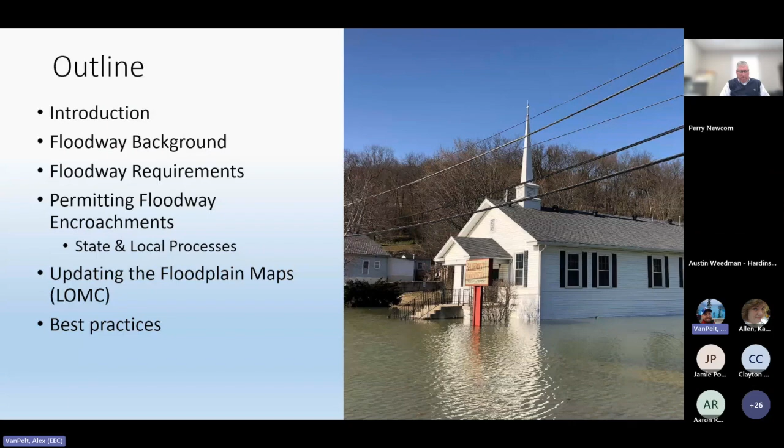So again, if you have questions as we go through any of this, guys, please ask them in the chat. All right, so diving right in, let's talk through the introduction.

If any of you have ever seen a presentation from me, I always start with these slides because they're important. So why do we care about floodplains? Floodplains are just inherently dangerous areas. The maps that we look at are actually a probability map. It's showing us where a flood is most likely to occur, right? So anything in the floodplain is considered to have high flood risk.

From 1996 through 2020, that's about a 25-year period, Kentucky had 100 flood deaths, which is significant when you look at that same period because we had about 1% of the U.S. population, but we accounted for about 4.5% of all the flood deaths in that 25-year period. If you bring that period all the way up until the end of 2024, essentially today, that number would be well over 150, just because during the Eastern Kentucky floods in 2022, we lost more than 40 people due to flood-related deaths.

So a little background on the NFIP, because that's the program we're working under. The National Flood Insurance Program is a voluntary program that no community has to join. A little over 90% of Kentucky communities are in the National Flood Insurance Program, but it is voluntary, right? So not all communities are within.

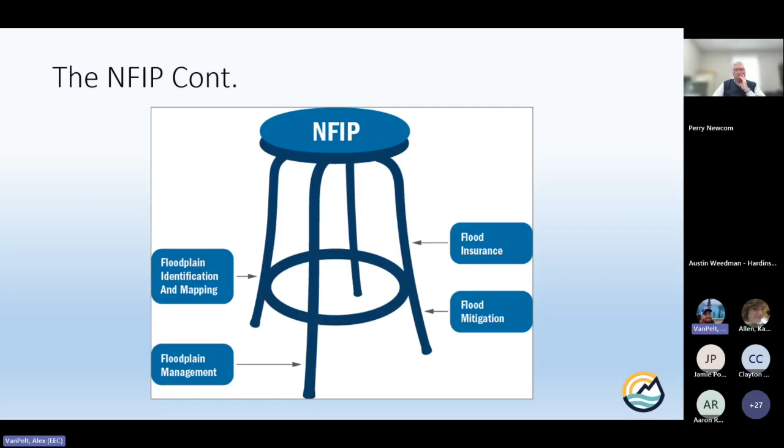All right, so that's our introduction. Let's start talking about floodway specifics.

So what are we talking about when we say floodplain or floodway specifically? The floodplain is pretty simple and intuitive - it's the low-lying area adjacent to a river or stream that is subject to periodic flooding. It's kind of the overflow valve for water flowing during a high flow event. A typical stream, within its banks, can usually contain anywhere from a 1.5 to a 2 year storm event - a storm as big as you'd expect to get only about every other year. We regulate under the National Flood Insurance Program up to the 100-year event, so significantly more water, and that water has to go somewhere - it overtops the banks and spreads out across the plain. That's our floodplain.

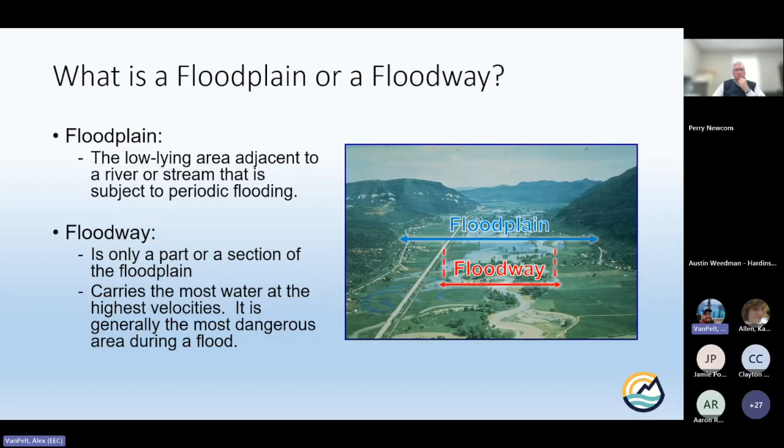When we're talking about the floodway, it's still a portion of the floodplain, but a very specific section. The floodway is typically the area closest to the stream, and it carries the most water during flood events. Those waters typically flow at higher velocities because the water is deeper and experiences less friction across the bottom or banks of the stream. The deeper the water gets, the less friction it experiences, and typically the faster it can flow. So the floodway really is the most dangerous portion of the floodplain during high flow events.

When it comes to mapping that risk or identifying our flood risk, FEMA is ultimately responsible for producing, updating, and maintaining all the flood insurance rate maps - what we commonly call floodplain maps - for everything in Kentucky. The Division of Water is a longtime cooperating technical partner with FEMA, which essentially means we subcontract that work from FEMA. We still create the maps to FEMA specs, and FEMA still funds those updates and reviews.

But the Division of Water, we're the ones doing a lot of the legwork - the communication, the public meetings, and things like that. So we're essentially a subcontractor for FEMA for the map updates.

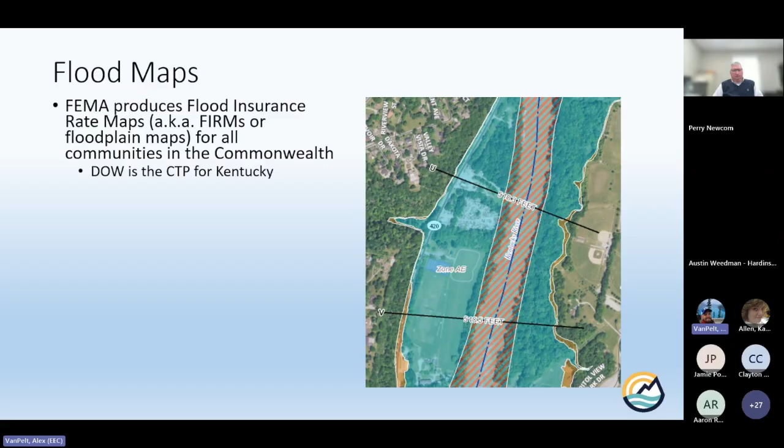On the flood insurance rate maps, they're going to show you the area of 1% chance or greater of flood - that's our 100-year floodplain, shown in blue on the map to the right. Other common things on these flood maps are your regulatory floodways, typically only found in Zone AE, shown here in the center of the map with the blue and red colored hash mark. That's the floodway for that portion of the Kentucky River.

In AE zones, you'll typically also find base flood elevations, and the 0.2% chance floodplain - what they used to call the 500-year floodplain - shown in that beige gold color on the edge of the 100-year floodplain. You'll also find community landmarks like corporate boundaries, county boundaries, streets, highways, and interstates - things that help you reference where you're at in your community.

Once these floodplains are identified on the flood insurance rate maps, those are the areas where we start regulating development. Once you move into that second leg of the NFIP stool, everything shaded in blue or blue-red is the area where permits are required and where flood insurance is mandatory if you have a federally backed loan.

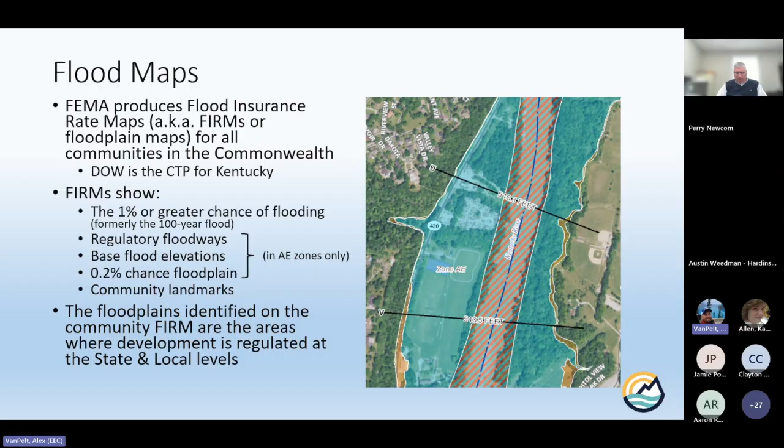So specifically when we're getting into the floodway, before I show you how they create it, I want to give some background. Within the floodway, that's a very specific portion of the floodplain. Nothing can be put there that would cause any rise in base flood elevation. The easiest way to think about it is you can do whatever you want in that area, you just have to show that what you're doing isn't going to cause a rise.

Remember, the floodway is the area that floods first, with the fastest velocities and deepest water. It's generally the most dangerous area of the floodplain during a flood event. So floodways are more restrictive than the rest of the floodplain, simply because they're typically more dangerous.

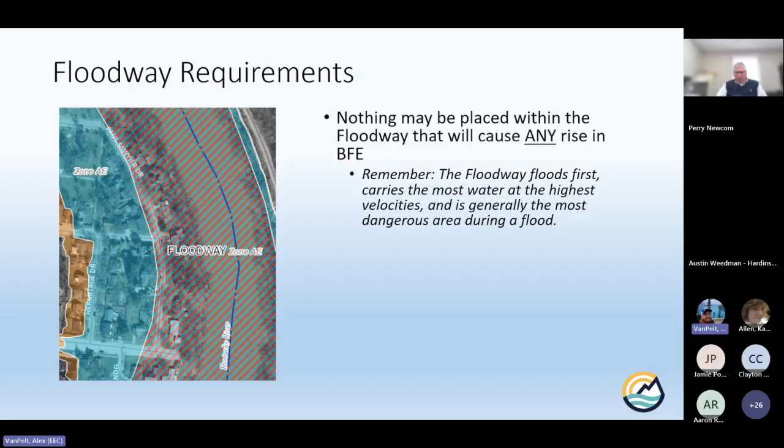Anybody wanting to do work within the floodway has to hire a professional engineer, or PE, who has to do an engineering analysis, basically showing their work. It's not enough to say this is such a little project and the river's so big. You have to show your work to prove that what you're doing isn't going to cause a rise. So the professional engineer the property owner hires has to submit data to the Division of Water.

That data includes hydraulic models showing the proposed conditions, what they want to do on that piece of property in the floodway. They have to show those models to us as part of their permit application process, and they also have to complete a no-rise certificate form, which we'll talk about more when we get into permitting the encroachment later on.

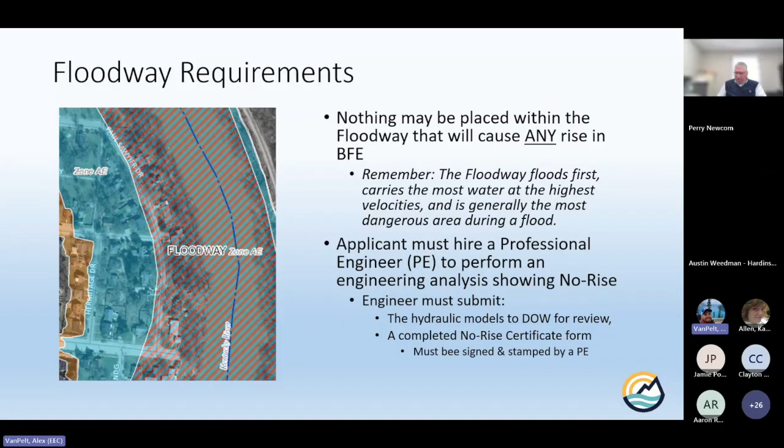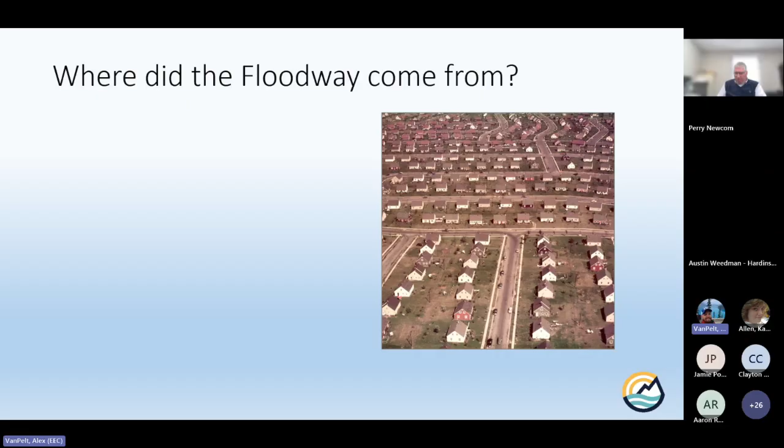So where did these floodways come from? Well, that's a long story. Floodways early on were really a simple solution to a very complex problem, and I'm going to show you that by going through a little timeline here.

In 1968, the National Flood Insurance Act was passed by Congress, actually as part of the Housing and Urban Development Act. This act stood up the National Flood Insurance Program, established what the program was about, and set up the carrot and stick parts of the program, such as communities managing their local flood risk while the federal government makes insurance available and ties grant dollars to it.

It also established some basic floodplain and floodway regulations in that original 1968 Act. About 10 years later, in 1977, President Carter signed Executive Order 11988, one of the primary guiding documents that has shaped everything we do in floodplain management since. In it, Carter said to provide for the discharge of the base flood, or what we now call the 100-year flood, so that a cumulative increase in water surface elevation is no more than a designated amount.

This was basically the first recognition that if you have very strict floodplain requirements, you're essentially making those parts of your communities unbuildable. So we don't want to do that. We want to allow for some level of development in these areas because they are beautiful areas and people want to typically live or work near water.

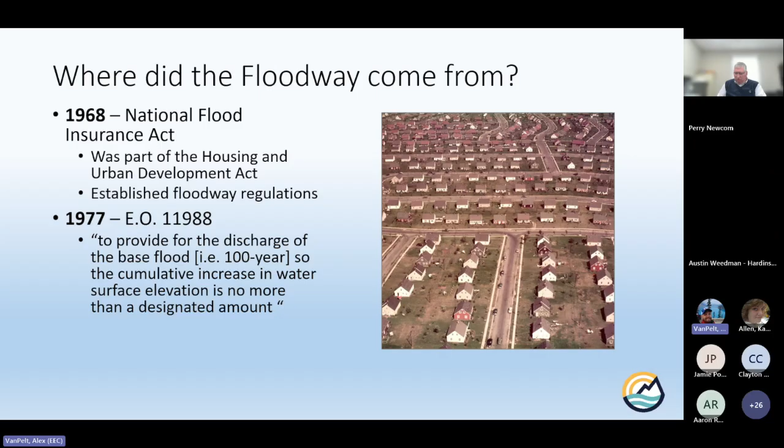President Carter, when he signed this, ordered the Army Corps of Engineers to do a study to settle on what that designated amount was. In 1978, the following year, they released that study that basically set the floodway target at the 1 foot allowable rise that we have today. So you can develop in the floodplain and cause up to 1 foot of rise without running afoul of the floodplain regulations.

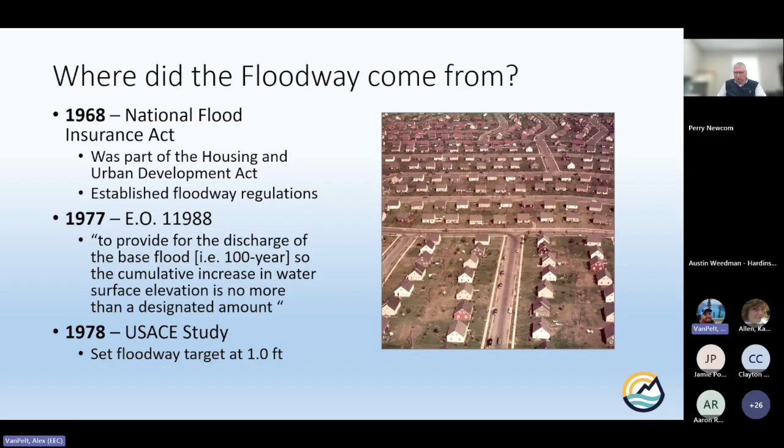A couple years later, in 1984, this is after FEMA was created, so they were the ones managing the National Flood Insurance Program at this point instead of HUD. This is also where we started to get to the point where we had good enough data that instead of just creating boundary maps, they started creating the first actual flood insurance rate maps. Those are the first step in the maps we're still using today.

So in the mid 80s is kind of where you started hitting the point where there was enough data and confidence in the data and the engineering that they started putting the floodway boundaries on the flood insurance rate maps. Once that happened, once it's on the floodplain map, the only way it can be removed is by either a letter of map change or a floodplain map update. So once the floodway is on the map, we're going to be using it probably in perpetuity unless there's some major change to the National Flood Insurance Program.

So once a floodway is on the map, it's pretty much there. Over time, though, floodplain managers started realizing some of the issues and limitations with using floodways as they were originally designed. Once you start hitting the 2000s and 2010s, the data has caught up, so some of those initial engineering challenges when they were first setting these floodway targets no longer really existed.

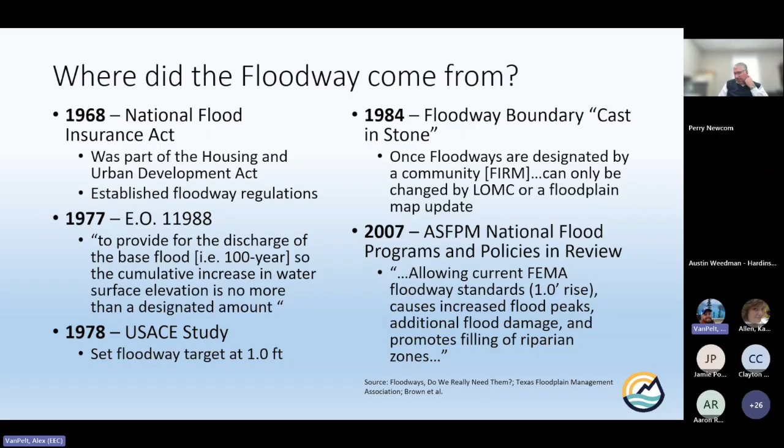You see additional flood damages because you're allowing folks to develop in these high risk zones, and you're promoting essentially the filling of some of these riparian areas—riparian meaning the green space areas along streams or rivers. People want to live close to water, and when you lose those riparian areas, you're also damaging your floodplain, meaning it may not store as much water as it did before, but you're also losing other ecological benefits. You're dealing with water quality issues at that point, things of that nature.

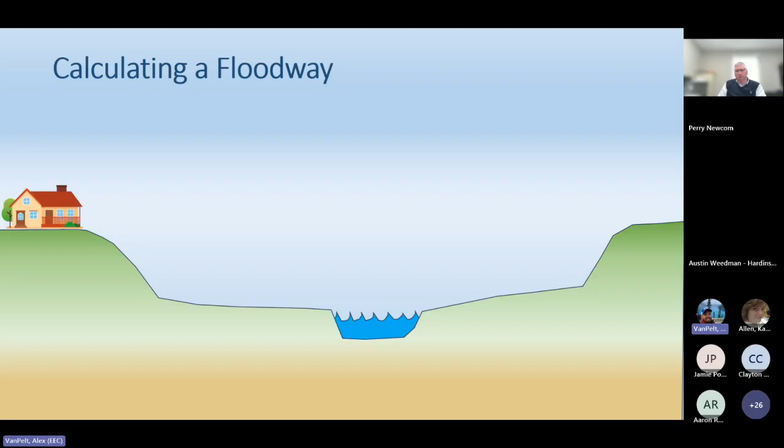So how do we actually calculate a floodway? Now that we know where they came from, let's talk about how our risk map team actually goes through and updates the floodplain maps—how do they actually get to a floodway on the map? Before we can calculate a floodway, the first thing we have to figure out is our base flood elevations.

So when we're looking at that, there's two primary factors that can influence your community's base flood elevations. The first one is essentially our stream flow amounts or our rainfall—basically how much water and how it falls across the watershed. That's our hydrology, the study of how water falls across the landscape.

Once it's on the ground, where does it go? That's primarily dictated by our topography or our ground elevations. So how water flows across the ground is the study of hydraulics. So when you hear us say you have to hire an engineer to do an H&H study, or we need the hydrology report or the hydraulics report, that's essentially what we're talking about: the study of how much water is falling on an area and how it flows once it reaches the ground. Those are the two primary factors we're looking at.

All of that leads us to our stream channel. As I mentioned before, a typical stream within the banks of a channel can hold anywhere from a 1.5 to a 2-year storm event. But the National Flood Insurance Program regulates up to the 100-year event. So where does that water go if it can't stay within the banks of the stream? It's going to spread and go up and out.

Once we know approximately how much water is flowing through an area at a certain point, we can do a probability analysis—I think it's actually called a regression analysis. They also do a gauge analysis. There are a lot of different ways, but they've essentially figured out, during that 1 in 100 chance flood, how much water is going to be flowing past a given point.

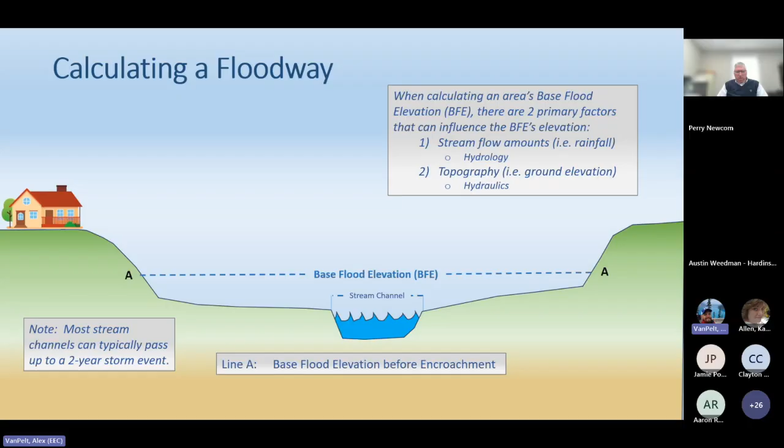And then where does that water spread out? That's our topography. Once you have those two things, you essentially have your base flood elevation—how high we expect the water to get during that 100-year flood. The extent of that base flood elevation as it spreads out across the landscape is our 1% chance floodplain, the floodplain we regulate. Basically, everything shaded in blue is areas of the community we expect to be covered, either partially or fully, during that 100-year flood.

So you might have a tenth of an inch, or you might have 10 feet of water, but it doesn't matter. If you're in an area shaded blue on the floodplain maps, that's an area we expect to see some level of water during that 1 in 100 chance flood.

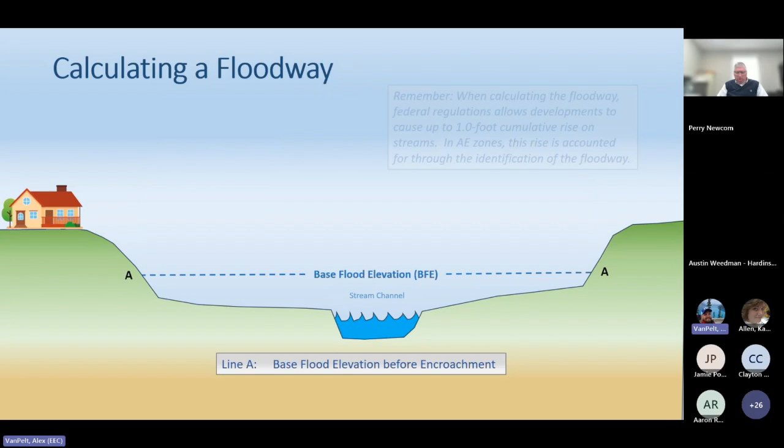Once you have your base flood elevation, the next thing we have to do is remember our floodway requirements. The floodway is basically set up so you can cause up to a 1 foot cumulative rise on a stream without running afoul of federal regulations. So when calculating a floodway, we're essentially going to squeeze the landscape until we cause a 1 foot rise in the base flood elevation.

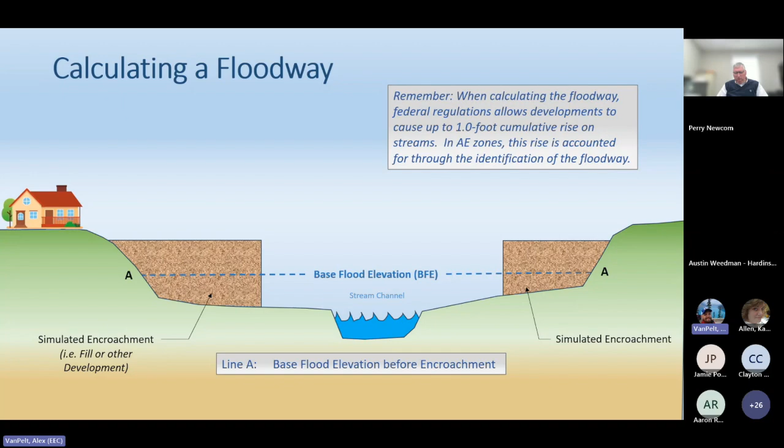Nowadays it's all done in a computer, but we basically simulate some level of encroachment—either we raise the ground elevations up above the BFE, or we put fill in, or they create a flood wall or some other type of impermeable barrier—where essentially we're squeezing and squeezing on our floodplain. When that happens, you're losing a lot of the storage you previously had, as those simulated encroachments are on the left and right side of the floodplain.

When the water can't spread out, there's only one way for it to go, and so it goes up. They keep squeezing that floodplain until they hit that 1 foot allowable rise, which is also commonly called a surcharge—basically the upper limit of what you can do under the regulations without running afoul of them. Once you have that 1 foot allowable rise, everything between those two points where that simulated encroachment was occurring becomes our regulatory floodway.

So that 1 foot allowable rise that the NFIP allows is already calculated when you're looking at the floodplain maps in the floodway. That floodway is the area that has to be reserved to allow the 1% chance flood to flow past without causing more than that 1 foot allowable rise. You can see as you squeeze that floodplain, you get that 1 foot rise, and everything in between is our floodway—so really, we're already calculating that in. You don't have to worry about that.

Now, this is just a simulated encroachment—we're not actually squeezing the floodplain. This is all done in a computer model. So our line AA, that blue line where our base flood elevation is, when you're looking at it on the map, that is still going to be the regulated floodplain. Everything we expect to get wet during that 100-year flood still requires permits, still requires insurance if you have a federally backed mortgage, and things like that.

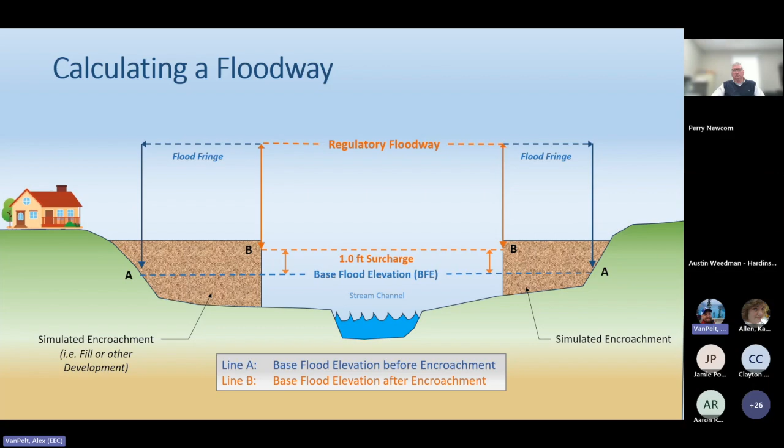All right, so let's dive into, now that we know the history of the floodway and what some of the requirements are, or how they get to what it looks like on the map, let's start talking about some of the floodway requirements. So there's three levels of regulation that all feed together in the National Flood Insurance Program: federal, state, and local. We're going to start with federal, and then move our way over to local as we go through this.

Hopefully, what you're going to see with this is a lot of these regulations are identical or nearly identical across all levels. So starting out with the federal requirements, the Code of Federal Regulations, CFR, that is actually where we find our regulations.

So Part 40... Title 44 of the Code of Federal Regulations, Part 59, is the definitions for everything floodplain, floodway related.

So in the definitions, they actually define what a regulatory floodway is. It is the channel of a river or watercourse and the adjacent areas that have to be reserved to discharge the 100-year flood without cumulatively increasing the water elevations more than that 1 foot allowable height. That's what our floodway is.

Again, hopefully you saw that visually on the last couple slides as we were going through. But this is the area of the floodplain that we have to reserve to make sure that any development we do doesn't increase surface elevations more than that 1 foot allowable rise.

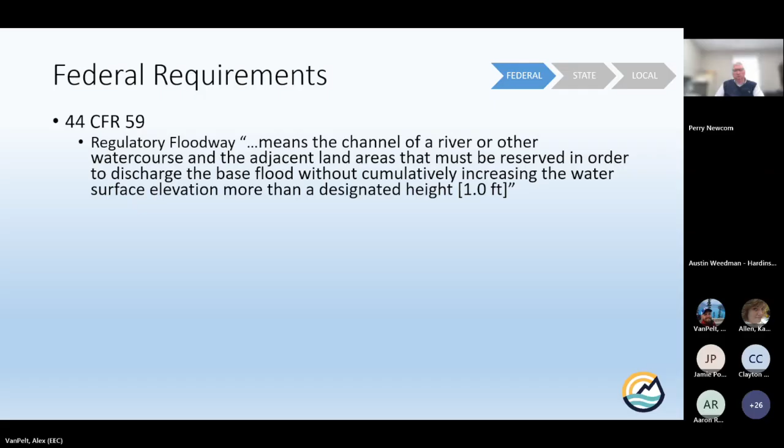The other part of the Code of Federal Regulations is Part 60. That's actually where the federal regulations live as far as what's allowable in the floodplain, depending on what level of map detail you have.

So 44 CFR Part 60.3 D3 is actually where it talks about encroaching on the floodway. It prohibits encroachments, fill, new construction, or substantial improvements and other development within the floodway unless it has been demonstrated through H&H analysis that an encroachment would not result in an increase in flood levels during the base discharge.

Again, you can do whatever you want in the floodplain, but you have to show through that hydraulic and hydrologic analysis that your engineer does that it's not going to cause that rise. If you're interested, I included the link to the CFRs there at the bottom. You're welcome to read through it.

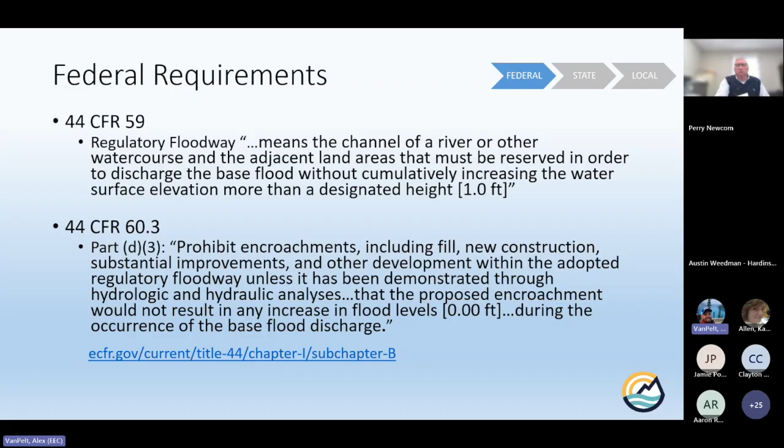All right, moving on from the federal, let's talk about some of the state requirements. So Kentucky, we actually have a state statute that gives us statewide permitting authority. Those are our Kentucky Revised Statutes.

That's what's actually passed by the legislature. So KRS 151-250 is actually our state permitting authority. It basically says no person, city, county, or other political subdivision of the state shall develop in any area adjacent to a river or stream, or in the floodway of the stream, unless plans and specifications for the work have been submitted and a permit issued.

So basically, this is where we go back to anytime people say, I don't need a permit, or I'm not in the floodplain. We have authority to make that call.

Along with that, Kentucky's unique. I talked earlier about how in the NFIP, it's a voluntary program — no community has to join. Well, because we have statewide permitting authority, we actually are able to issue floodplain permits in every community across Kentucky, whether your local community participates or not.

And part of that authority, 151-320, says that the community CEO shall enforce with the cabinet the provisions of 151-250 and any of the regulations issued along with it. So whether your community participates or not is going to dictate whether or not you have to issue any local permits. The state permit applies, though, regardless of if your local community joins or not.

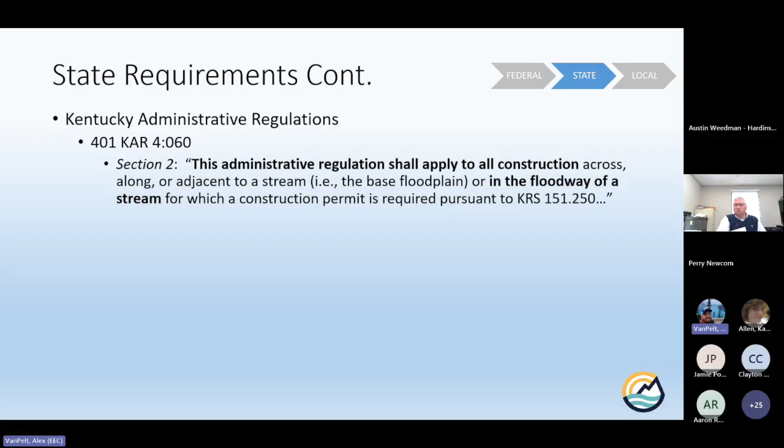Specifically talking about floodway encroachments, our state regs basically say all encroachments including fill, new construction, substantial improvements, or other developments are prohibited unless the encroachment shall have no impact nor result in any increase in flood elevation. Hopefully you're starting to see that these regs are kind of repeating themselves at all three levels. They're pretty similar across the board.

Still don't see any questions, so we're going to move on.

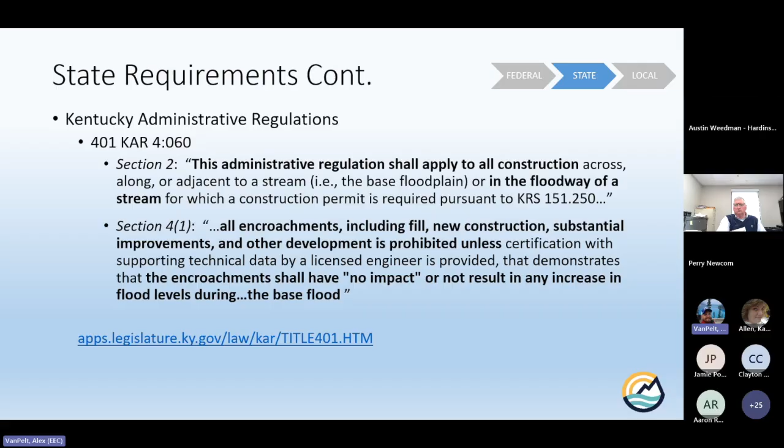So for the local ones, for the next couple slides, I actually included the citations from your local ordinance. If your community uses the state model ordinance, which I'd say is about 90% of you, you should be able to use these citations and go straight to this point in your ordinance.

Some of you, though, like Lexington, Versailles, Woodford County, some of the ones where your ordinance is baked into maybe your planning and zoning ordinance or something like that, the citations might be different, but all of the information we're going to talk about should be in your local ordinance somewhere. If it's not, please let me know immediately, and we can get your ordinance amended to include it.

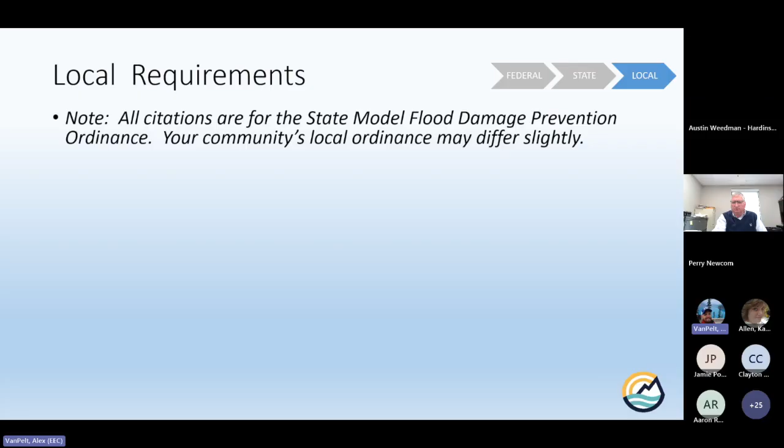So your local ordinance includes a floodway definition, just the same as the state and federal do: the channel of a river or watercourse and the adjacent area that has to be reserved in order to discharge the base flood without cumulatively increasing water surface elevation. Again, the definitions are pretty much identical across the board.

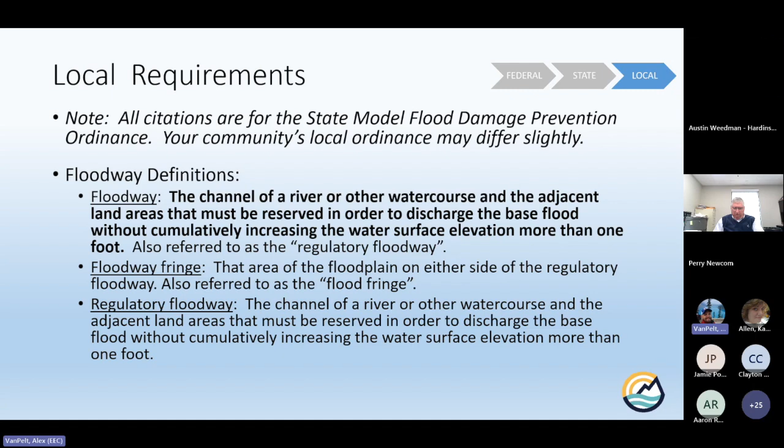There are a couple other definitions specific to floodways in your local ordinances, such as floodway fringe, or what's the difference between a regulatory floodway and the floodway -- really nothing. They're both defined identically in your ordinance, and they also refer to each other, so it's kind of a closed loop of definitions.

Outside of the definitions, Article 4 is essentially where your ordinance says here are the jobs and duties we kind of expect the local floodplain manager to do.

Section C2 of that article basically says review and use any other base flood data. Floodplain administrators shall obtain, review, and reasonably utilize any base flood elevation and floodway data available from a federal or state agency or other source. Now, you're not required to use data from another source if you don't feel comfortable. Again, reasonably utilize -- but if we have a professional engineer submitting a model to us, that's one where we should review it and reasonably utilize it.

But again, just because somebody gives you something that says oh, this won't cause a rise, and it's just a letter typed up or something, we don't have to use that. It's reasonably utilized.

Article 5 of your ordinance is actually where you start to get into the actual development requirements -- here are the standards that we're going to require folks to meet if they're in the floodway. So B5 specifically talks about floodways, and it says we're going to prohibit encroachments unless certification with supporting technical data by a registered professional engineer is provided demonstrating that it shall not increase the base flood elevations.

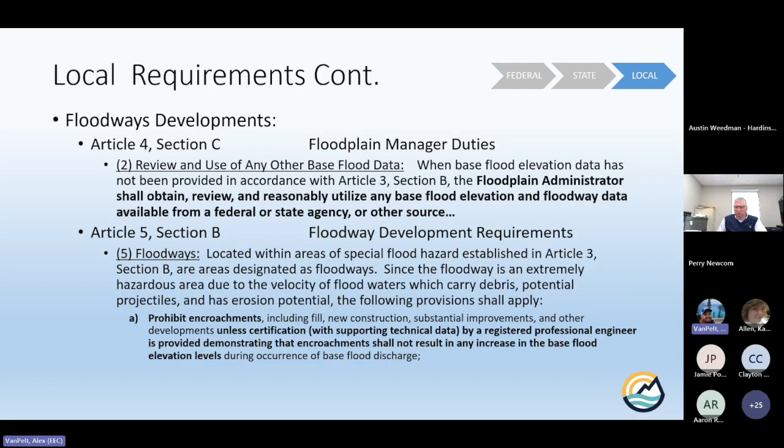Again, the standards are pretty much identical, but your ordinance specifically says we're going to prohibit encroachment unless you can prove to us that what you're doing isn't going to cause a rise.

Other parts of your ordinance specifically talking about floodways: Article 5, Section G is talking about critical facilities. Now, critical facilities can be a little bit of a broad term because what's critical to one community may not be critical to another. A great example is a community north of Frankfort -- I forget which county specifically -- but for them, one of their critical facilities was actually their school bus depot.

Their plan was, in the event of a flood, to use that to evacuate areas of the town, such as the school or the assisted living home. But what they realized is that the school bus depot is actually in the floodplain as well, so you might be without those if you don't evacuate your school buses. So what a critical facility is can change community to community.

But in the ordinance specifically, it says construction of a new critical facility is not permissible in the floodway. Period, full stop, there's not really an exemption for that. You can still put one in the floodplain, but your local ordinances basically say critical facilities are not allowed in the floodway, period.

The last part of your ordinance I want to talk about when it comes to floodways is actually a variance. There is a variance procedure—we're not dictators, we're not telling people you have to do this no matter what. There is an appeal, there is a variance procedure in your ordinance. But your conditions for variances when we're talking about floodways basically flat out say a variance shall not be issued within a mapped regulatory floodway if an increase in flood levels would result. So even though there is an appeal and variance procedure, your appeals board cannot issue a variance if it's going to cause a rise in BFE in the floodway, period, full stop.

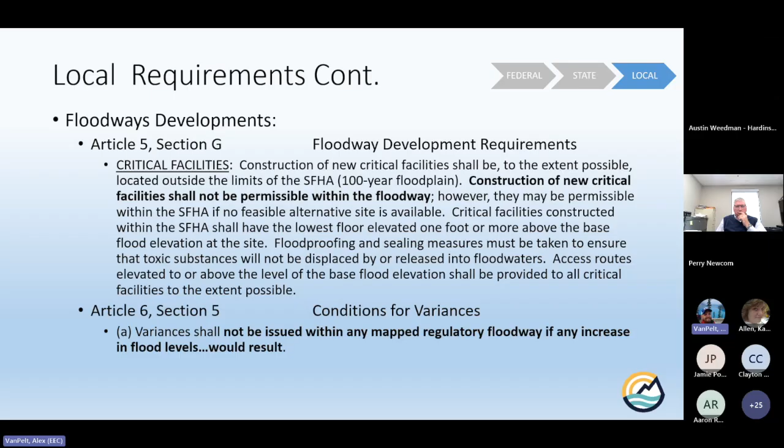All right, so now we know what our requirements are, we know how floodways are calculated. Let's actually start talking about how do we get to permitting the encroachment side.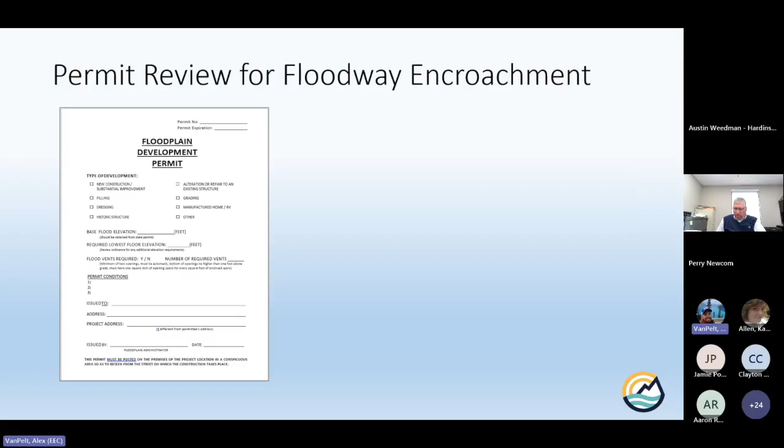First thing we got to remember is, if your community's in the National Flood Insurance Program—and I think everybody on here, your community is in, I'm pretty sure I didn't see any rogue names on here—your local community is required to issue permits to ensure that any proposed development in the floodplain or floodway meets your local ordinance requirements. Reason this is done is because you know your community better than I do sitting in Frankfort. I know Kentucky better than anybody sitting in the Region 4 FEMA office in Atlanta, or in their DC offices. You guys know your community better than anybody else, so final authority to decide what can or can't happen in your community is left up to you.

Now, we run into this more frequently than I really like, but there are some communities who seem to think that as long as they get the state permit, they're fine, even though we're in the National Flood Insurance Program—and it doesn't actually work that way. Every single state permit that we issue, if your community participates, has a condition on it that says Perry County, Franklin County, City of Frankfort, whatever, participates in the National Flood Insurance Program. As such, a local permit's required. If you don't get a local permit, the state permit becomes null and void. So if they get the state permit but don't come to you and get local sign off, the state permit actually doesn't do them any good. So they definitely need to come to talk to you all before they begin any development.

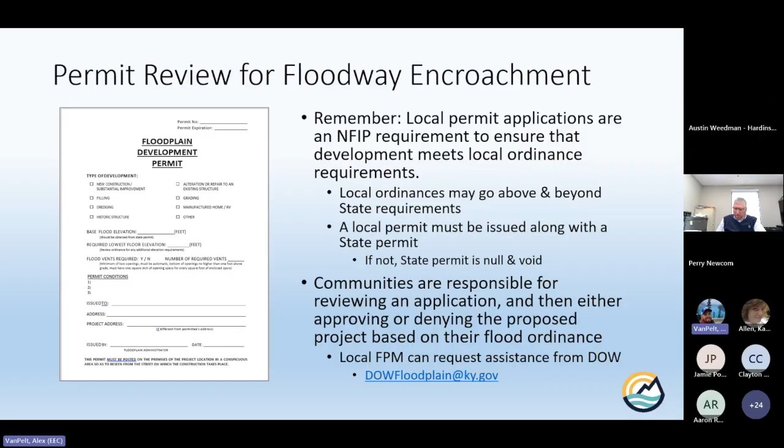All right, so let's actually talk about the encroachment options. There's several ways you can actually encroach in the floodway. Some of them are very small, very simple. Some of them are very large and can be very complex. But there's different levels of encroachment options that we can look at. A couple of them are very simple for you guys as floodplain managers, but two of them are the ones where we do need to spend a little more time and effort. So I'm going to go through these with you guys to lay this out a little bit.

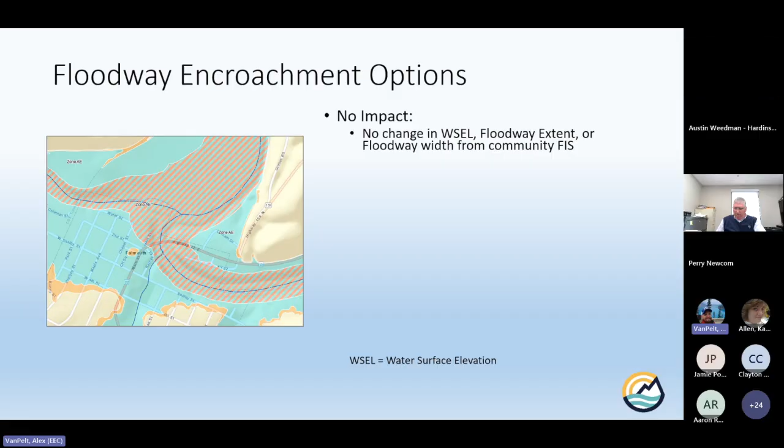So the first one we're interested in would be essentially a no impact, meaning we're going to do something in the floodway that's not going to cause any change in the water surface elevations, in the floodway extent, or in the floodway width that's going to make any change from what's published in your community's flood insurance study. Options of this would be things like walking trails, green spaces, riparian areas, or something simple like general property maintenance - a couple trees that need to come out, trimming bushes or planting trees, ag actions like planting corn or beans or tobacco. Those would all be things where while you're doing something in the floodway, you're not causing any impact to any of the elevations or what's actually mapped for the floodway.

The second one is probably the most common. This is where we're going to get into a lot of detail over the next couple slides. So this is where we're actually talking about no rise situations. You're doing something that's not going to be a no impact, but what you're going to be able to show is no rise, meaning 0.00 feet, 2 decimal points. That 2 decimal points is very important - that's the FEMA standard you have to be able to meet.

So when you think back to your middle school or junior high algebra, when talking about rounding - any impact of 0.004 or less would round down. So we would actually consider 0.004 to be a no rise, because at a certain point the impact or change you're causing is so minimal that it's literally unmappable. We cannot update the floodplain map based on 4/1000ths of a foot. But if you have a change or impact that's 0.005, that would round up. And at that point, you're not able to show no rise to 2 decimal points anymore, because 0.005 would round up to 0.01, which is not showing no rise to 2 decimal points. So no rise is essentially where we are causing some very, very minor impact, but again, at a certain point it becomes unmappable on the floodplain maps.

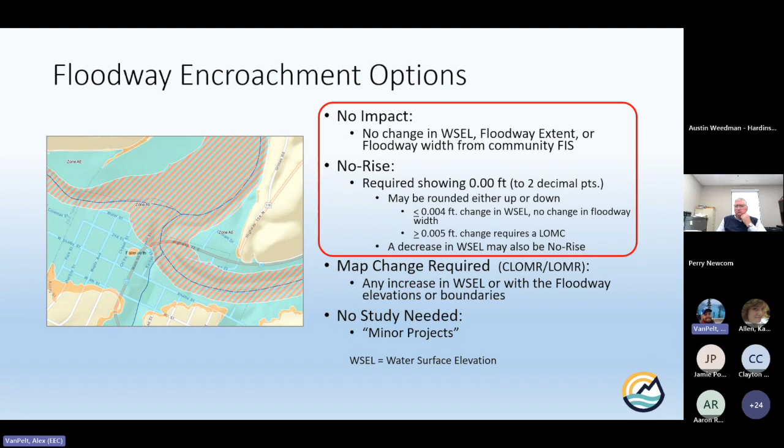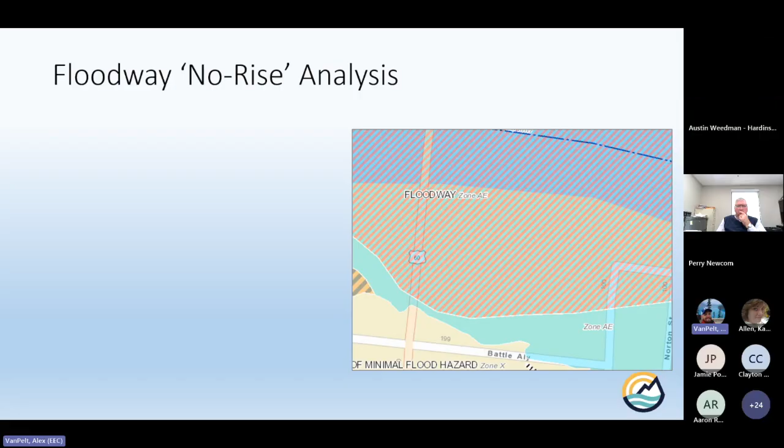All right, so when we're looking at a no-rise analysis - this is specific to Division of Water, but it should also apply to your local programs - I'll explain what we do so you can apply that to your local processes. When we require a no-rise analysis, we require that the applicant or person applying and their engineer submit 4 hydraulic models to us to be reviewed.

The first one is the effective model. This is the model we used whenever we created the floodplain map that you see online or on the paper maps everywhere. Again, we created a model when we updated the maps, and that model is still available.

You just have to let us know you need it. So the first thing we want is a copy of the effective model, because anything you're doing later in this process is based on using that effective model and having the correct starting point.

The next model we want is a duplicate effective. We want you to take that effective model and rerun it, and make sure the outputs are identical, that nothing's missing, that a number didn't get transposed or something like that. We basically want you to duplicate that model just to show you're still getting the same outputs before you do any corrections.

The third one is the corrected effective. When you're developing in these areas, it's not a cheap process to develop in the floodway. Typically you're going to have things like site plans, design drawings, maps, additional surveys, cross sections, maybe LiDAR data. There are a lot of different ways to improve on these effective models to show what the existing conditions on the ground are today. We want you to take any information you have access to and actually use it, to make these models as accurate as we can. So whatever data you have, plug it into these models, rerun it, and that's your corrected effective model.

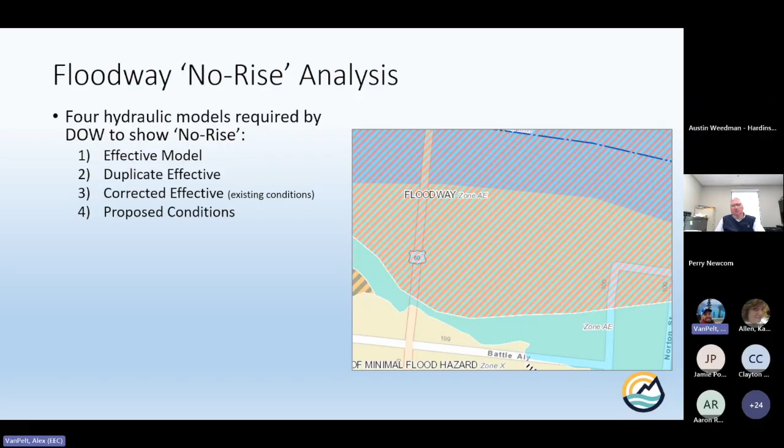This sounds really complicated, but it's actually not as hard as you would think, because those first two required models are pretty simple.

Again, those first two are pretty simple. It's the corrected effective and proposed conditions models where the professional engineer that the applicant hires will have to do that additional legwork.

Some other things we typically require submitted along with these four models would be a project narrative — give us a good description of how you're going to be building it. Is it going to be done all at once, or in phases? Are there areas of temporary impact versus permanent impact? What materials are you using, what elevations? The project narrative needs to paint a full picture of what and how they're wanting to do it.

We typically also require some type of topographic work map — show us a map with cross sections or design drawings, so we can see if you have cross section plots or a detailed site survey. We want all of that submitted as part of the application so we can review it and decide whether a permit is needed. All of this should be submitted as part of the application package.

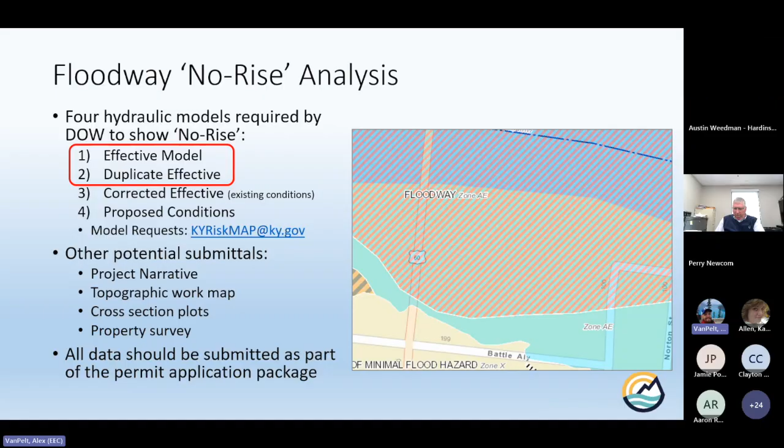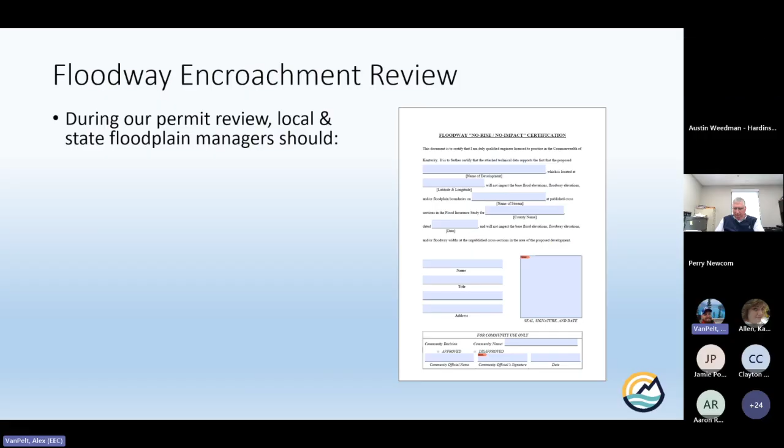During the review, state and local floodplain managers have a couple of things we need to be doing. This applies a little more to local managers than the state, but it's something we should all be thinking about when looking at a floodway encroachment. First, as has been a recurring theme this entire webinar, we have to ensure that what's being proposed doesn't cause a rise or an impact, not just at the project site, but upstream and downstream as well.

If you put a bridge across a stream and you can show no rise where you're at, great. But if you're causing a rise upstream because water is all of a sudden ponding a little more than previously, that's an impact that, while the actual site might not be impacted, we are going to be looking upstream and downstream.

For the locals, review any submitted technical information to the best of your abilities. If you've not seen a design drawing, if you've not read a cross-section, if you've not looked at cross sections on a map and then looked at the cross sections on the designs and tried to piece together what it looks like in 3D in your head, that's sometimes a difficult thing to do right out of the gate.

So review any of the technical information to the best of your abilities. But again, don't hesitate to reach out to us at Division of Water if you need help reviewing some of this. Again, we have professional engineers on staff who do floodplain management full time. That's all they do. So let us know if you need help reviewing some of this information.

And then the other thing you should be doing when we're ensuring no rise is we need to keep a record of all of the data they submit to us. That is what you're basing your decision off of. So make them give you copies of the models, even if you maybe can't open the models because you don't have the software on your end. Go ahead and get copies of it anyway.

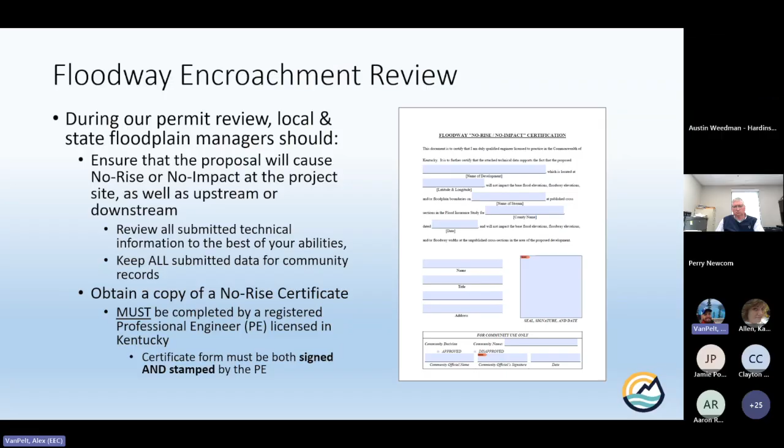So those no rise exemption requests that we were talking about earlier, we're talking about some of those small isolated obstructions that maybe don't rise to the level of requiring the hiring of a professional engineer, which typically is many thousands, if not tens of thousands of dollars pretty quickly to do one of these analyses. So for small isolated obstructions, FEMA does allow for an exemption request in their guidance.

The term this guide uses is what they call a minor project. It does give some examples. So for things like an individual mailbox, roads, driveways, or parking lots at grade, not on top of grade, at grade meaning you excavate a little bit of the topsoil material and then backfill with either the asphalt, the pavement, or the gravel to create your parking lot or driveway. Something like that at grade.

Open style fences, the examples they gave would be things like chain link fences, barbed wire fences, the type of wood fences that you typically see around horse farms, things like that. Those are all open style fences. And then things like single telephone poles, as long as the foundation's below ground, all of those would fall under minor projects.

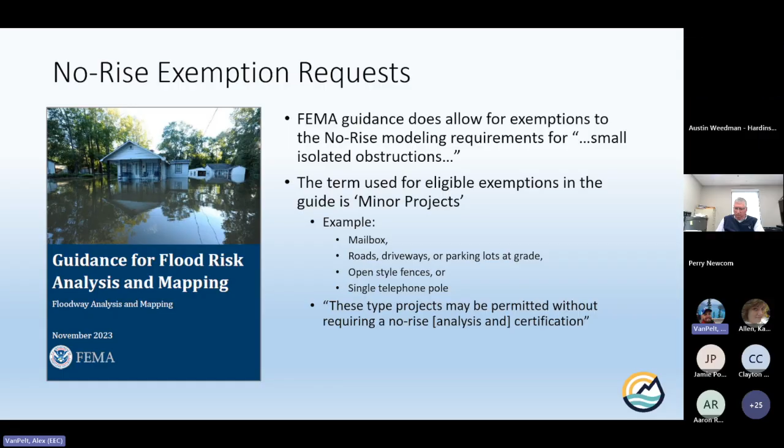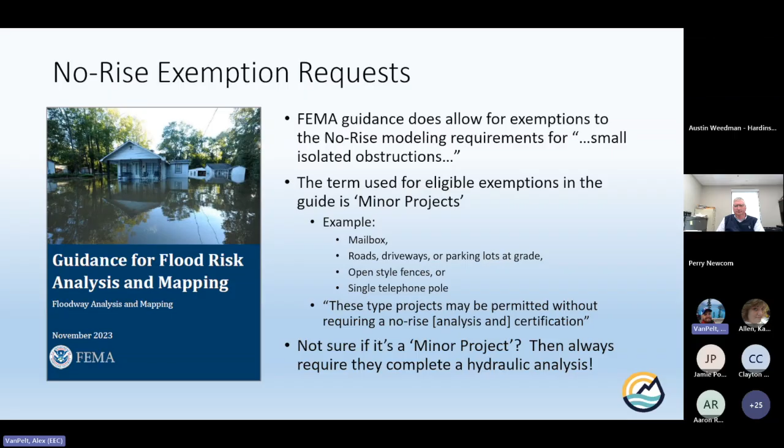The guidance I always tell people when we're talking about minor projects is, if you're not certain, and I mean certain, that it's a minor project, your default should always be to require that they complete a hydraulic analysis. Again, this is for things we are positive are not going to cause any rise or impact on the floodplain. Even though a mailbox might be in the floodway, it would have to be a very, very small stream for that one pole to cause any kind of rise. So if you're not sure it's a minor project, always, always, always have them complete a hydraulic analysis.

When it comes to making those requests for the state permit and for the local permit, the first thing I want to mention is Division of Water. We have a couple general permits that are out there. Neither of our general permits can be used in the floodway. So anytime they're doing work in the floodway, they're going to have to get an individual permit from us. General permits categorically exclude any work in the floodway.

So when they submit for their state permit, their individual permit from Division of Water, they need to submit a request and their justification in writing on their application as to why they feel consideration of an exemption is warranted. We reserve the right to require them to complete an H&H study at any time. So just because they feel that they deserve an exemption doesn't mean that we have to give it to them. If we feel uncertain, or if we feel certain that it is going to cause an impact, we can require an analysis at any time.

Similarly, for your local permit when they are doing these minor projects in the floodway, they still have to come to you for a permit. They still need to submit their request and their justification in writing on their application whenever they submit for their local permit as to why they feel consideration of an exemption is warranted. You also reserve the right to require that H&H study at any time. So again, just because somebody feels like this is a minor project and should be getting an exemption, doesn't mean you necessarily have to give it to them.

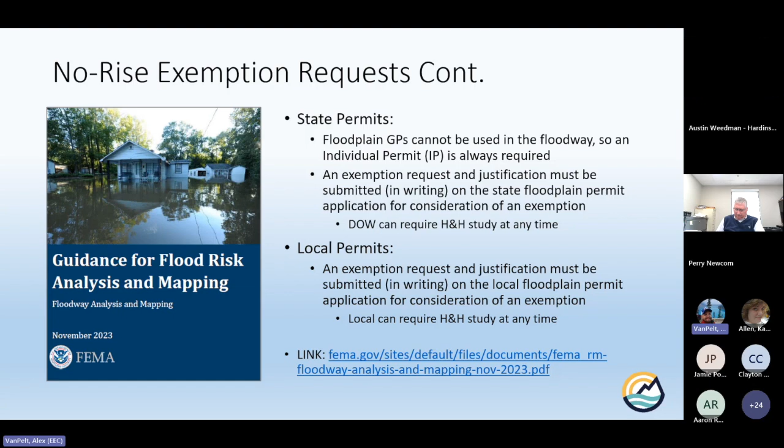All right, so let's talk about changing the floodplain maps. Let's think back to why we have the floodplain maps. Maps are really there to identify areas with high, moderate, and low risk of flooding. Notice I say low risk, not no risk, because anywhere it rains, it can flood. Even on the side of a hill or up on top of some of the mountains in eastern Kentucky, if you get a big enough rainfall event, anywhere can flood.

These maps are used for making determinations, but they also help to communicate flood hazard or flood risk information to those citizens. So they tell you where the hazard's at - this is the area that we think is going to flood when the 100-year flood comes. We also use them for floodplain management decisions.

So, is a permit needed? Yes or no? Lenders and their determination companies use them to determine when you're closing on a house, as part of your mortgage documents, whether or not you have to carry flood insurance. Lenders are required by law to make you carry insurance if you're in one of those high risk zones. And then they used to be used by insurance agents to help rate policies.

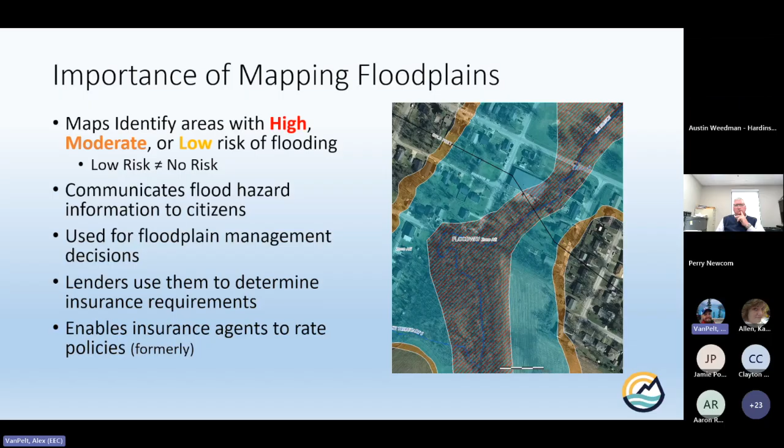That's not done as much anymore since FEMA changed how they rate their premiums, but that's what they used to be used for as well.

So when we're talking about actually changing the map, we understand that things are dynamic. The flood hazard information on your maps is really a snapshot in time. It shows you the risk at the time the map was created.

There are two primary ways FEMA baked into the map update process. First, you have map revisions that physically alter the maps themselves. This is what we do on the watershed-wide scale, or what used to be done county-wide, updating all the streams at once for a particular watershed, for example the lower Kentucky River watershed.

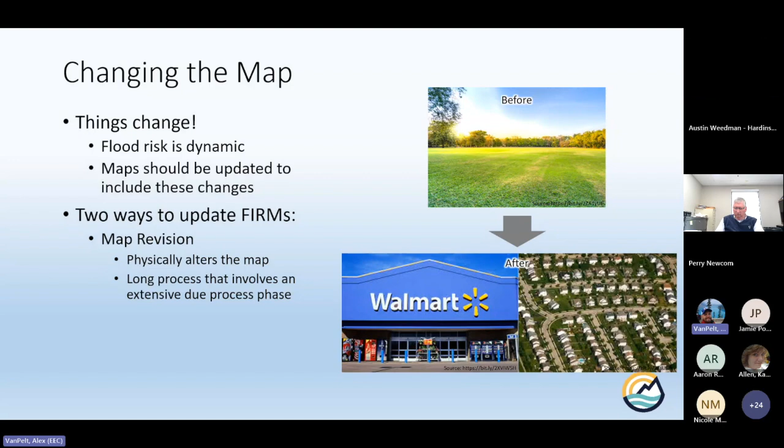This is a very long process. There's a lot of engineering, a lot of quality assurance checks, and also a pretty extensive due process phase, meaning it has to be published in the Federal Register. There's a 90-day appeal and comment period, and if there are any appeals, we incorporate them and do another 30-day appeal and comment period. It's a long process. Typically we can have the maps created in a year to a year and a half, but it takes anywhere from 3 to 5 years to finish the process due to all this due process.

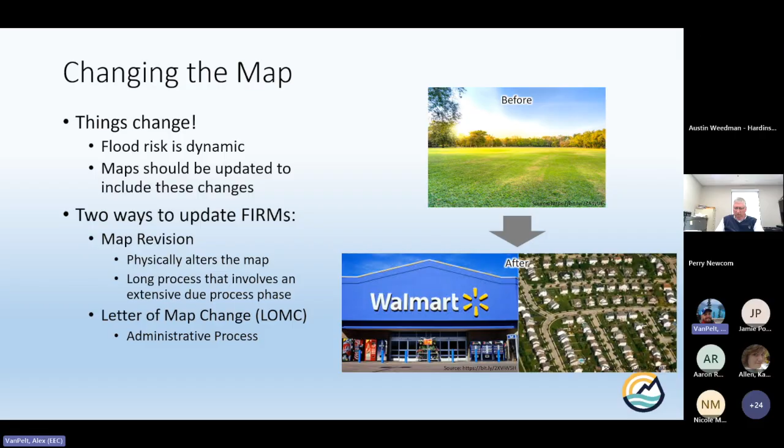The other way we can update the maps is through the letter of map change, which is an administrative process baked into this update. This is where we look at individual properties or segments of a stream, rather than the entire stream itself, only looking at specific areas of impact.

There are a bunch of different letters used for this letter of map change process. I'll go through them so you understand the differences, but a couple are very specifically used for floodway encroachments. The first and simplest, the one we see most often, is the letter of map amendment, or LOMA. This is typically for single or adjoining lots, to remove them based on better data than what was in the floodplain model.

For example, we might think we know the ground elevation and consider a house to be in the floodplain, but then they submit an elevation certificate showing the elevation is actually 6 inches higher, which would put it out. That's a typical LOMA. You can also have an 'out as shown,' meaning the lender's determination company made a mistake and said you need flood insurance when in reality you're not in the floodplain on the map. There's also a conditional letter of map amendment, CLOMA, which is done on the front end before you actually build or develop.

The next one is the letter of map revision, LOMR. This is where we start getting into bigger developments—subdivisions, commercial developments, stream crossings for roads and bridges, things of that nature. This is where we're actually changing how water flows across the landscape. Putting in a subdivision causes more impacts through that development process than a house that already exists, which would be handled under a LOMA, for example.

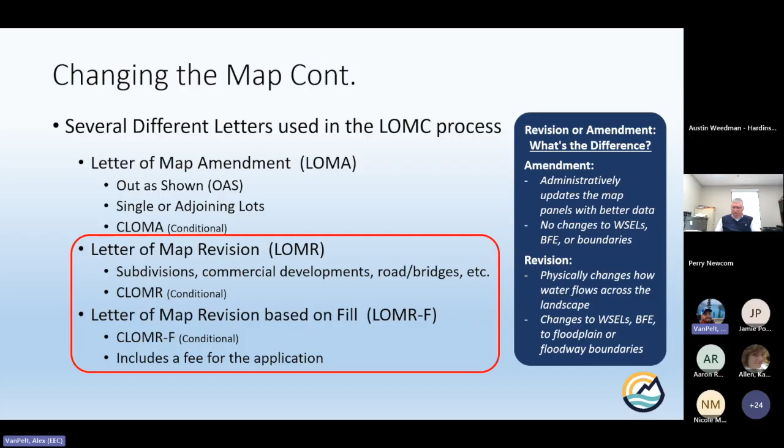When we're talking about floodways specifically, almost always you're going to be talking about a letter of map revision. Occasionally you'll see a letter of map revision based on fill, but those are pretty rare in the floodways because it's hard to do fill and show no rise at the same time. Typically that letter of map revision is what you're going to see most often on those projects where they can't show no rise.

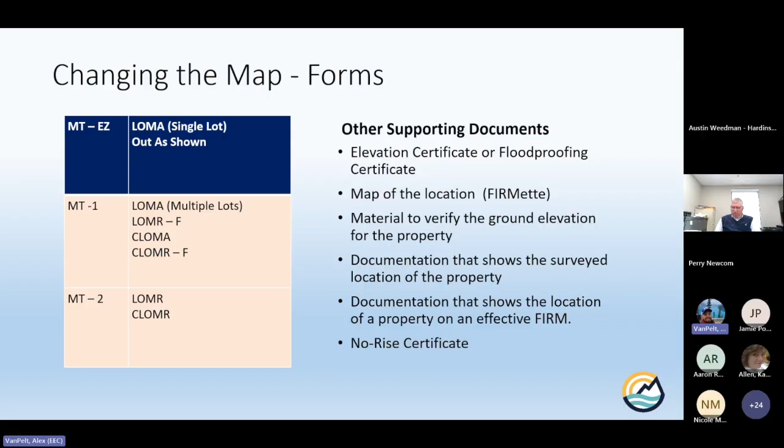Couple more things. FEMA doesn't make this process easy because the forms they require change depending on what type of letter you're submitting for. Most often, the letter of map revision and the conditional letter of map revision need the MT2 form. But I will say there is some good news on that front - we'll talk about what that good news is, I think, on the next slide.

For the CLOMR, LOMR, the letter of map revision and conditional letter of map revision, if they're going to cause an increase in the BFE or any change in the floodway that's beyond what's allowed in the state and local requirements, they basically have to get that conditional letter first. Before they submit for applications, they would go to FEMA, submit their engineering, their modeling, their evaluation of the impacts, and FEMA would say, okay, based on this information, here's what we need you to do to make sure you're not causing any negative impact to existing structures.

LOMRs also typically require some level of community support. That doesn't mean the community has to be the one doing it or that you have to agree with what they're proposing - it simply means you're not taking a stand against it. So a community acknowledgement form is typically required when somebody is submitting for a CLOMR, again to make sure the community is aware of the project on the front end. Signing that form doesn't mean you're agreeing with what they're doing or proposing; it simply means I acknowledge that they're submitting for this conditional letter.

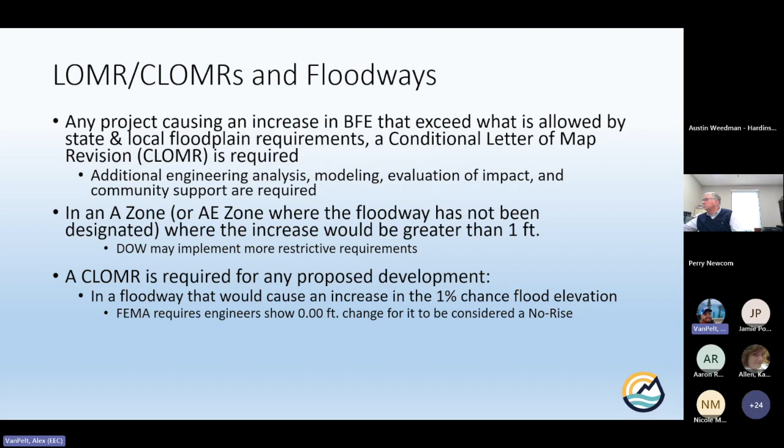CLOMR is required for any proposed development in the floodway that's going to cause any increase. Remember, floodway, federal, state, and local all say it's the area that has to be reserved to pass the base flood without any rise. So in the floodway, engineers are required to show 0.00 foot change for it to be considered a no rise. Remember your rounding examples from middle school algebra: 0.004 would round down, considered a no rise; 0.005 would round up to 0.01, which is not a no rise. Even though they're only 1/1000th of a foot different, rounding matters when we're talking about these models.

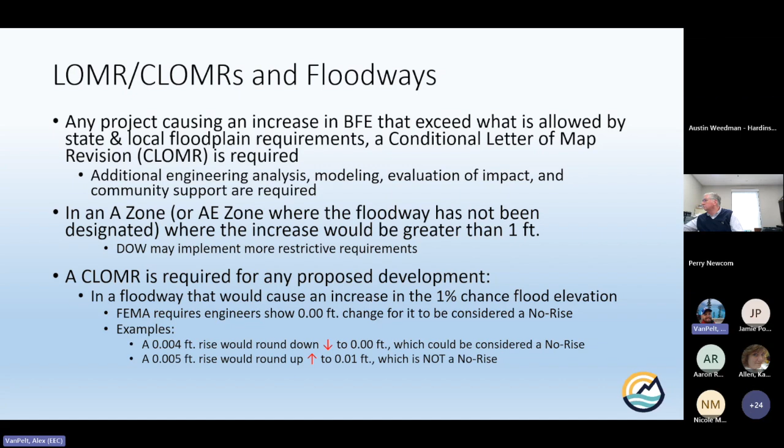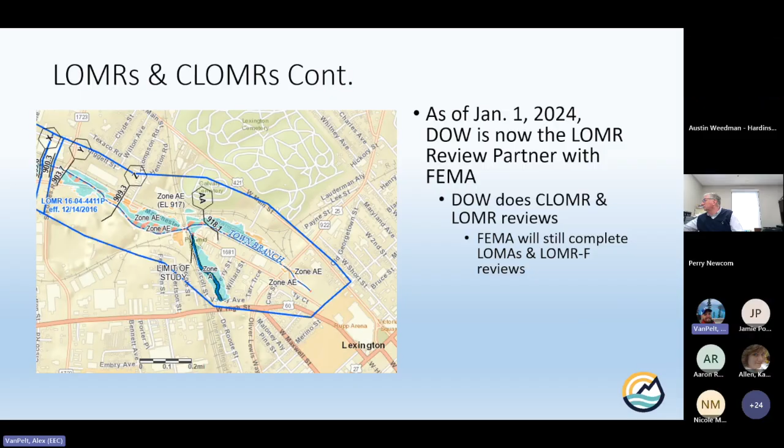This is the good news I was mentioning when it comes to LOMRs and CLOMRs. As of January 1 this year, Division of Water has been the LOMR review partner with FEMA, which essentially means we're subcontracting, doing the CLOMRs and LOMRs from FEMA. We're still doing it to their FEMA spec, but we're actually the ones doing the work now. So if you have questions about the letter of map revision process, or the conditional LOMR process, you're going to be working with folks from Division of Water rather than FEMA contractors. Casey Lynn Carter is our floodplain mapping point of contact. She does the risk map updates, the big watershed-wide updates, and she's also the LOMR review partner heading up that portion.

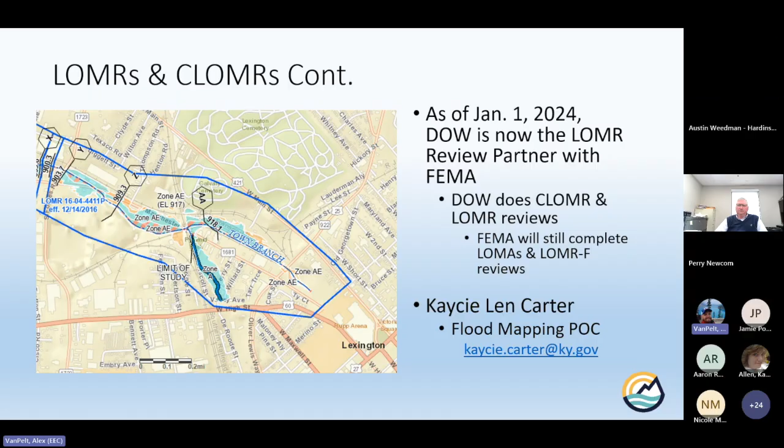When we're talking about changing the maps, whoever's actually applying for the permit, whoever's actually completing the work, they're the ones ultimately responsible for submitting that letter of map change application either to Division of Water or FEMA to update the map. You, as the local floodplain manager, should help them fill out that application to the best of your ability, but it's not your responsibility. Don't feel like you have to do it for them, otherwise it's not going to be done. If you're the owner of that piece of property, you're the one ultimately legally responsible for everything that happens on it, whether it's your fault or not. So it's the property owner's responsibility, or if they hire an engineering firm, the engineering firm will typically do that under contract.

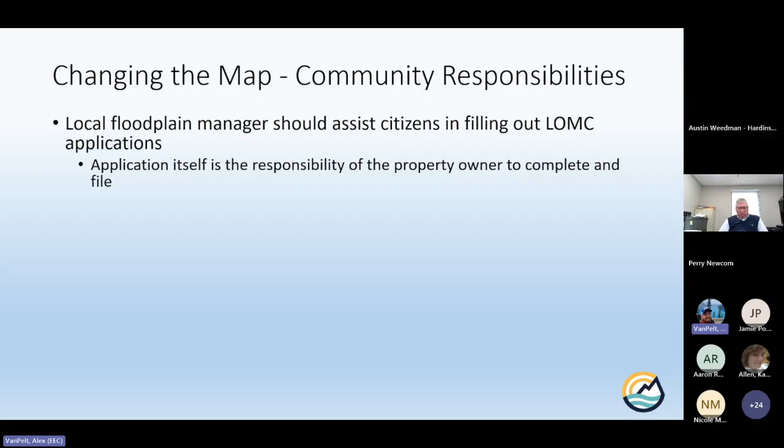For conditional letters of map revision or letters of map revision specifically, the community support through that community acknowledgement form is required. Again, it doesn't mean you agree with what they're proposing, but you don't have to sign the form if you're not supporting the project. So if it's going to categorically violate one of your ordinances, you don't have to sign the community acknowledgement form. That form is basically an acknowledgement, but you don't have to sign it.

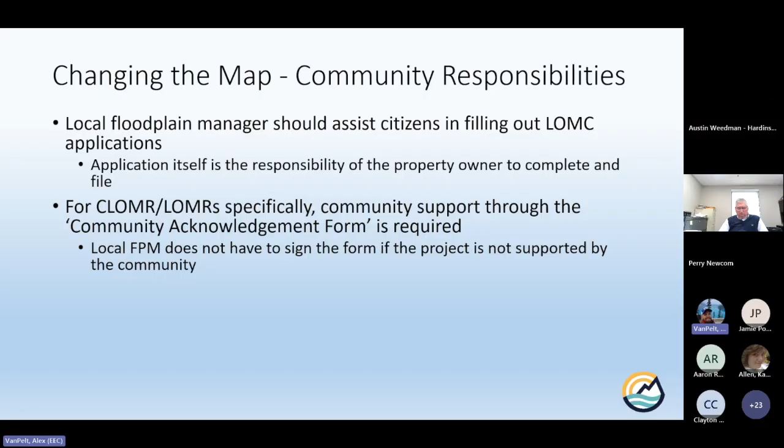As the local community, you are ultimately responsible for maintaining any copies of the letter of map change issued by FEMA or Division of Water, because they're superseding what's actually on your floodplain maps. Your community responsibility is to keep your floodplain maps updated and to keep copies available for folks in your community. You can file those wherever you feel is best, with your planning and zoning, or I've seen them with the floodplain administrator.

I've seen some where they put it in the local library where you can check out the maps. There's a lot of different ways you can do it, but they do have to be on file somewhere locally.

If you don't have copies of the effective letters of map change, don't panic. You can go to FEMA's Map Service Center, their portal basically, and download all of the PDF copies. That's actually pretty quick and easy - you just go to the website, search your community, and download all products. It's a very simple process, so don't panic.

JP, I see your question. We're getting pretty close to the end though, so I'm going to answer that whenever we round out to the end, if you don't mind. So just hold on to that, JP, if you don't mind.

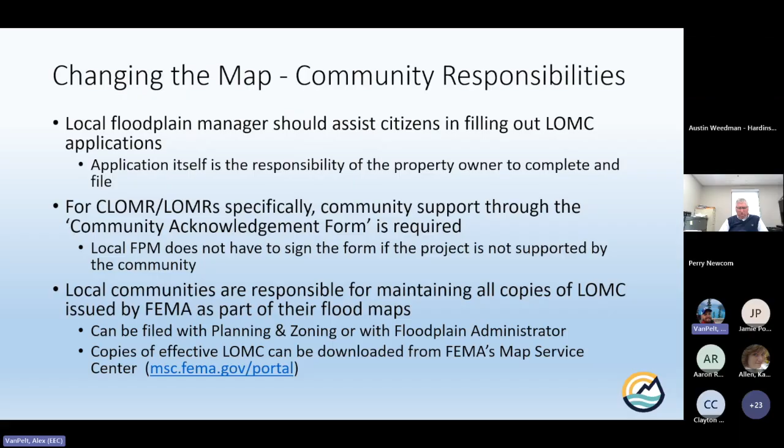All right, so that was how we're going to deal with our floodway encroachments. Now let's talk about some best practices.

I want to show you guys some good examples of what we can do with floodways, because I hear it all the time - I have a floodway on my property, there's nothing I can do with it. And that's not accurate, not accurate at all. When they're talking about a floodway on their property, you can actually do whatever you want - it is your property. The U.S. Constitution has a takings clause that says private property cannot be taken for public use without just compensation. A local or state government saying you can't use this portion of your property because it's a floodplain would probably be considered a taking if we got taken to court. So there's nothing that says you can't do anything you want on your property.

We went through all three levels of the regulations and showed that. What they do allow is we can say, okay, this is a highly risky area, for public safety or to prevent the need for our local EM to have to come rescue you during a flood event. We can set minimum requirements for that high risk area that you have to take. So that's really what we're telling people - if you have a floodway on your property, you can do whatever you want, provided you can show no rise.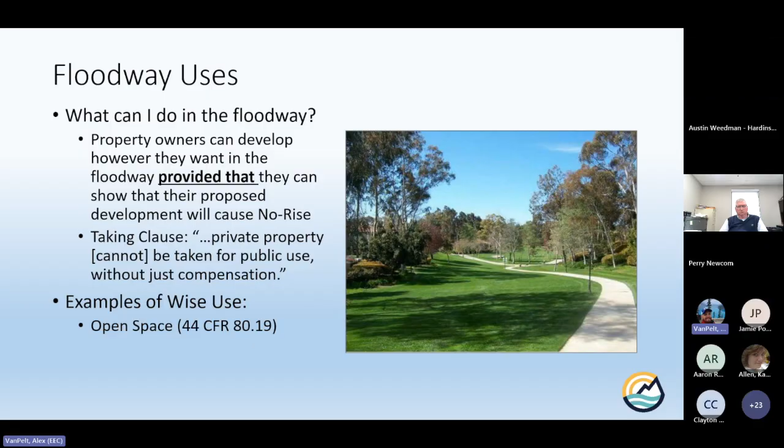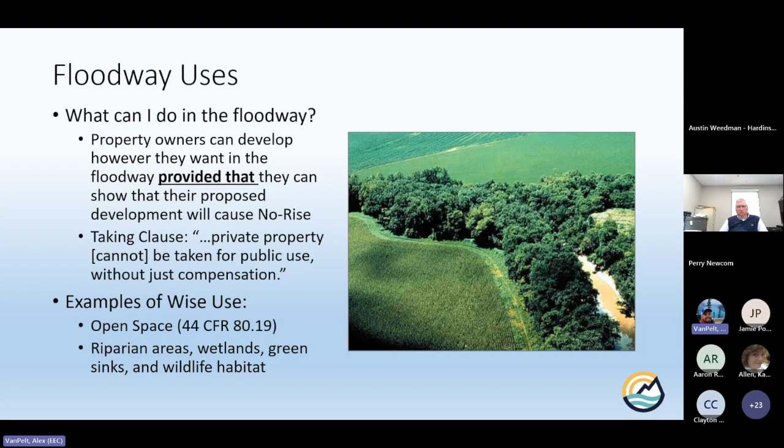These riparian areas also suck up a lot of the water out of the groundwater or the stream and evaporate it back up into the air, so it helps keep your flood levels a little bit lower. These green areas also capture a lot of potential runoff, so when the farmer harvests the corn in this image, for example, those riparian areas can help prevent erosion off into the stream by helping to capture some of that soil before it leaves the property.

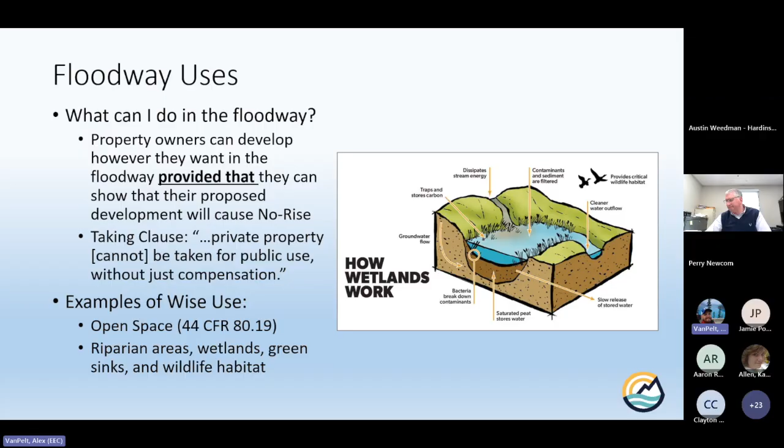Green sinks are another one - wetlands and green sinks slow water down, allowing the stream to dissipate that energy, and allow water to flow back into the groundwater. If it's soaking into the ground, we don't have to worry about it later when it's going to flood. It can filter contaminants, it helps pull carbon and sediment or debris out of the stream, and provides more wildlife habitat. There's a lot of really great things that come with having wetlands or riparian areas along streams. Other examples would be things like for recreation.

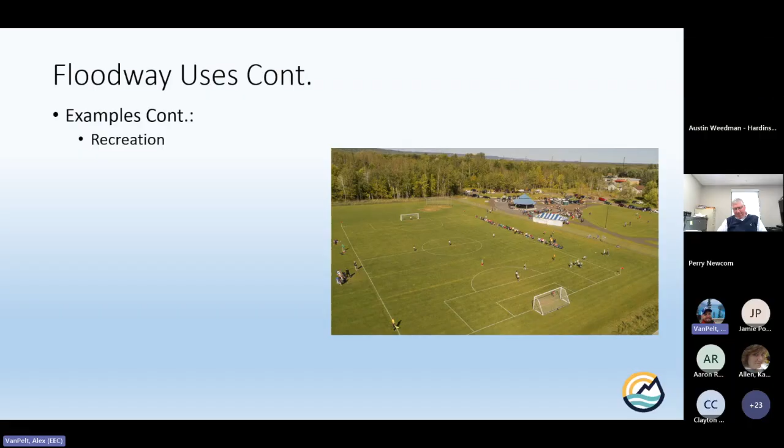Walking trails are another great one. There's a lot of mental health benefits and physical benefits that come with having these walking trails, especially being near water. Not really sure what it is, but humans are kind of drawn to being near water at all times, and there's a lot of good mental health things that can come from that.

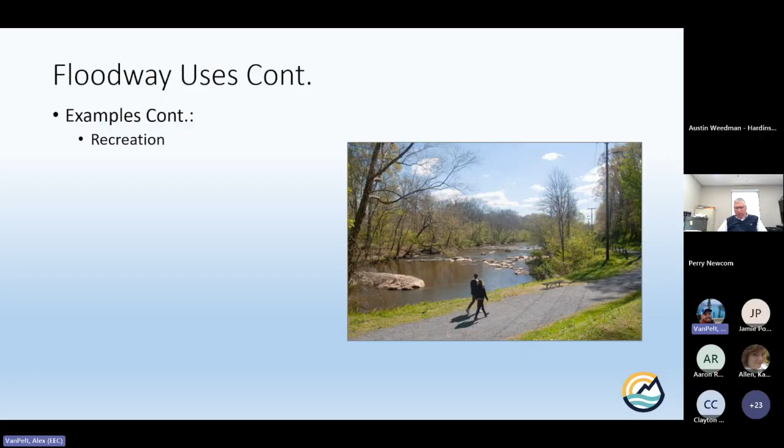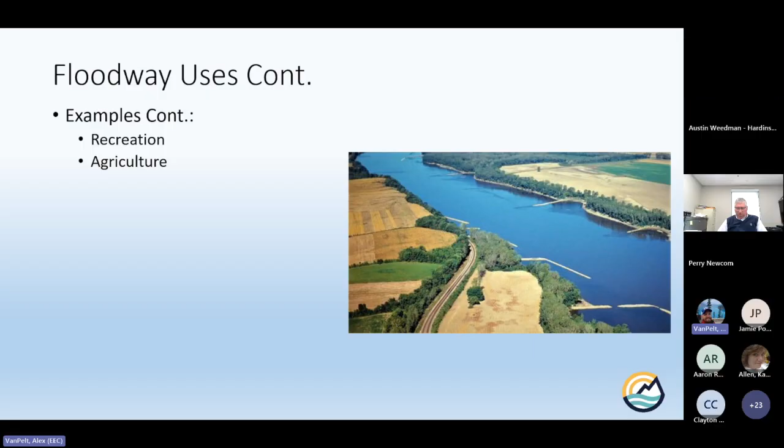Ag uses is another one that's really common here in Kentucky. So planting crops or tree farms or something like that in some of these areas along streams or rivers is another great use. You can also use them for industrial or commercial uses. Again, if you can leave them open, that's great.

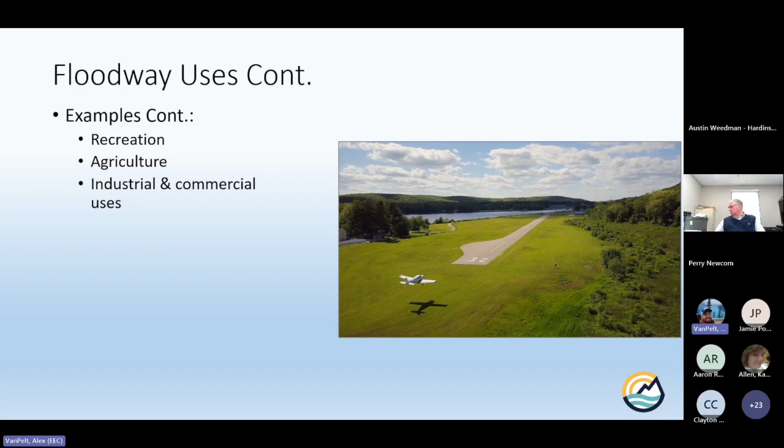Another one that's starting to become more and more common would be RV campgrounds, as long as they're limited stay campgrounds. Limited stay meaning you pull in, hook up with your quick disconnect utilities, stay for a couple days or a weekend or two weeks, and then you pull back home. With the price of housing nowadays, some of these campgrounds are starting to turn more and more into permanent stay campgrounds. On those, you can only stay for up to 180 days. You can't have any permanent attachments, so everything has to be quick disconnect. It has to be pullable by a lightweight truck or self-propelled. There are requirements, but if it's a limited stay campground, that's something that's pretty typically easy to get in the floodplain or the floodway. Really, the only thing I'm concerned with for something like this would be the electric or sewer hookups that are going to be at each site - those are the only things we want to make sure are protected during a flood.

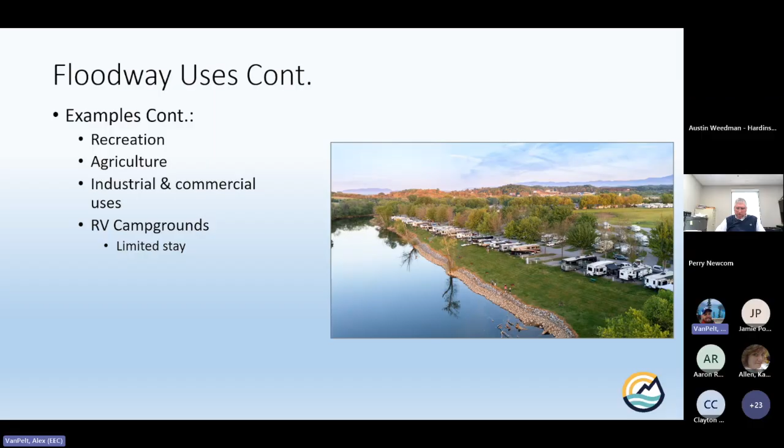The last thing: you can still do this for now, but you can have residential structures in a floodway. Now that's not ideal, because again, the floodway is the area that floods first, with the deepest and fastest moving waters. So it's not ideal. Building your house in a floodway can put you, your property, or your life at elevated or higher flood risk than would be typical, but the property owner should strongly be encouraged to consider alternative locations. You can still do that right now. When our new regs come in, that is something we're proposing to not allow - meaning residential structures in the floodway. You can still do commercial structures or open space, things like that, but residential structures don't make a lot of sense in the floodways. So for now they can do that, but hopefully in a year that'll be a little different.

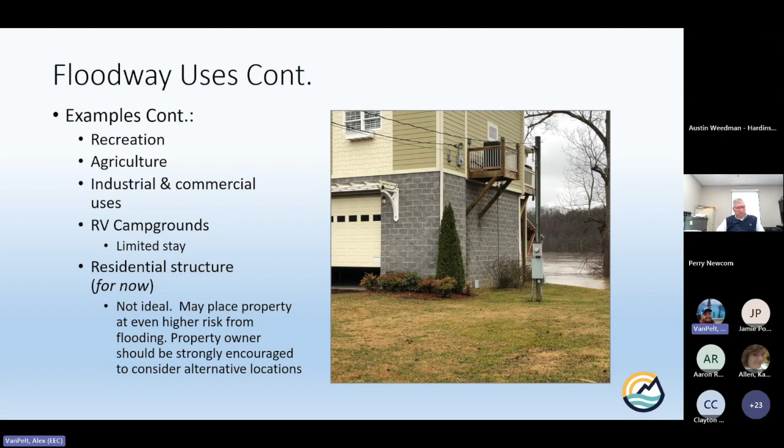All right, so key takeaways - what are some of the big things I want you guys to walk away from this remembering? Number one, we talked about it: floodways are the most dangerous part of a stream during a flood event. They flood first, with the deepest waters, fastest flowing, et cetera. We want to try to avoid being in the floodway or impacting the floodway if at all possible.

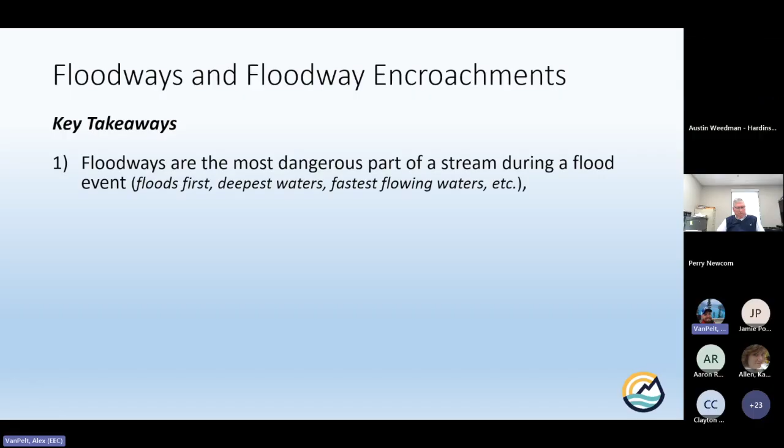Second, development projects within the regulatory floodway have to show they're going to cause no rise or no impact. I don't really care which one, but you have to be able to show that before we can allow that development to happen in the regulatory floodway. You have to be able to show no rise.

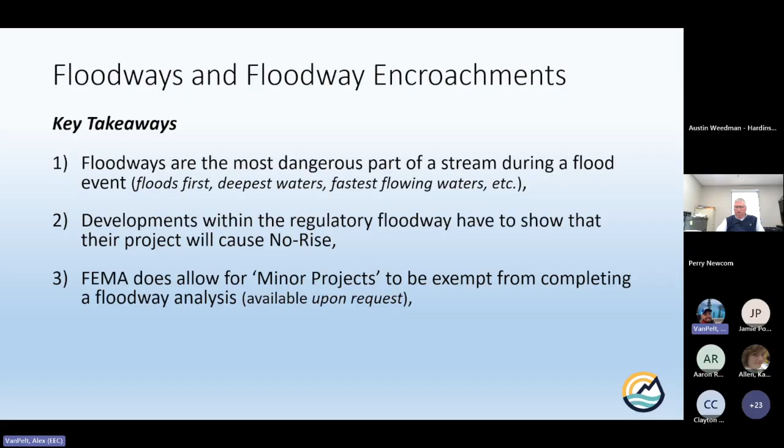Third, FEMA does allow for minor projects to be exempt from completing analysis, but again, upon request. Just because they're installing a mailbox doesn't mean they automatically get that exemption; they have to ask for it. And if we're not certain that something is a minor project, we're going to require them to complete that floodway analysis. So again, be certain, but that is an option.

And then the last one is, if a no rise is not possible, you might still be able to do the project, but you just have to do the additional legwork of getting that conditional letter of map revision, and then the actual letter of map revision once the project's complete. So you have to go through that CLOMR-LOMR process in addition to getting your permit and actually building the development.

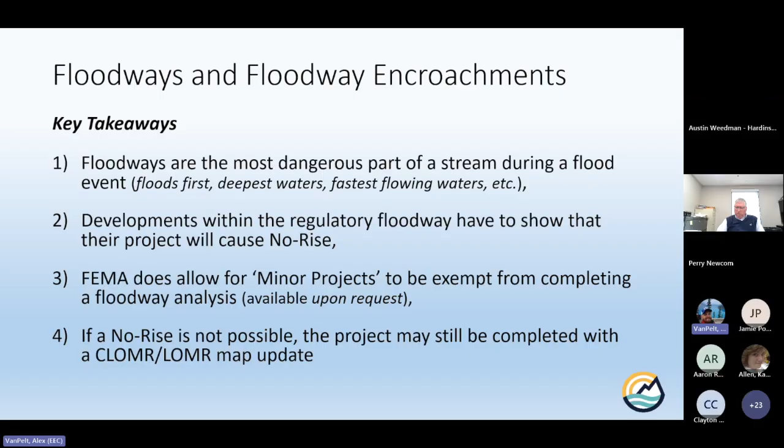Last thing I want to tell you guys is don't panic. Again, we're here to help. My job is to be the state technical expert for everything flood related. So if you have questions, don't hesitate to reach out to me. I'm going to show you my contact info here in a slide or two.

I prefer email, just because if I'm on the road or out in the field or something like that, I can respond as I'm able, maybe over lunch or in a car ride or something like that. If you call me and leave a voicemail, I will call you back at some point. I don't know when that'll be, because again, I'm out in the field probably a third to half of the time that I'm at work. So email me if you can.

But if I'm not around, or if you're not really sure who you need, you can also just email us at water@ky.gov. That's our general Division of Water contact email. You can also call our general line, and they will try to route you to the appropriate person. If you say the word flood and call that general line, they're going to route you to me or David. We are almost always the ones that end up with that. But again, depending on what you need, they'll route you to where you need to be.

The last thing before I start doing the Q&A, guys, is I do want to talk about some of the upcoming training opportunities. This was the second in our advanced floodplain management concepts webinars. We've done historic structures last month, and we did floodways today. Next month, we're going to be looking at new residential structures.